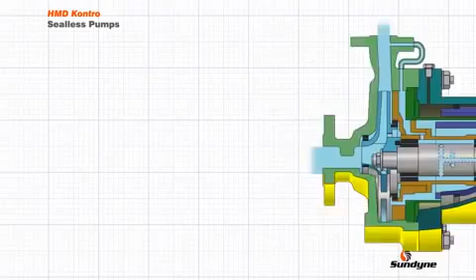Magnetic drive seal-less pumps, originally pioneered by HMD Kontro, have long been used to pump many types of liquid, including those that require safe and secure handling, without the added cost and complexity of mechanical seals and their associated support systems. This short video explains how this is achieved.

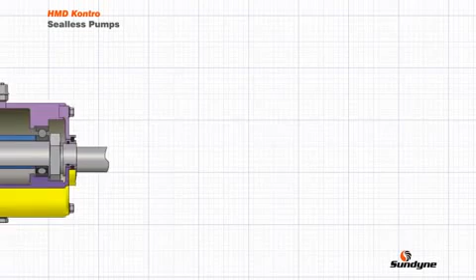The principle of operation for a magnetic drive pump can be best understood by building the pump up component by component. Firstly is the pump casing, consisting of the suction and discharge flanges and the casing volute. Inside the casing sits the impeller.

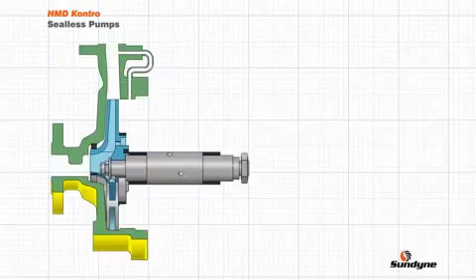Rotation of the impeller imparts energy to the liquid, causing the pump to operate. The impeller is supported by the internal pump shaft and shaft sleeves. The shaft is supported by the bush holder, consisting of a rigid holder and bushes or bearings which run against the shaft sleeves. Completing the inner rotor assembly is the inner magnetic ring.

This is a ring of coaxially arranged outward-facing permanent magnets, which are fully encapsulated with a resistant metallic sheathing. The final component in the primary liquid contact assembly is the containment shell.

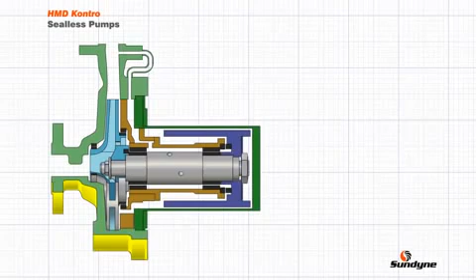This component is statically sealed with a gasket against the casing. The containment shell is usually manufactured from a high-strength, non-magnetic, corrosion-resistant alloy. Outside of the primary pressure boundary is a second outer magnetic ring with magnets that face inwards. The outer magnetic ring is located in the coupling housing, which is connected to the external bearing assembly.

When the pump is filled or primed, it can be seen how the liquid is completely contained without the use of any dynamic seals. The principle of operation is very simple.

The magnets in the outer and inner magnet rings are attracted to each other. So, as the electric motor rotates the outer ring, the inner ring rotates at the same speed, thus rotating the impeller and causing liquid to be pumped.

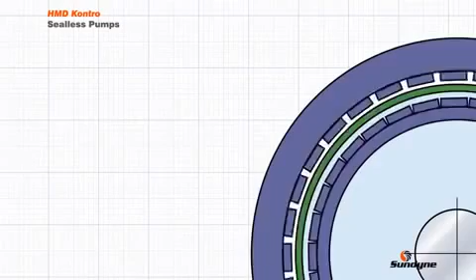To help understand how the magnetic coupling works, this animation views the coupling axially. The containment shell, shown in green, is positioned between the two attracting magnetic rings and will be subjected to the rotating magnetic circuits as the outer and inner magnetic rings rotate.

For strength and temperature resistance, the containment shell is usually manufactured in a metallic material, which is electrically conductive. It is this property and the rotating magnetic circuits that causes eddy currents to be induced in the containment shell. These induction losses manifest themselves as heat and have to be accounted for when selecting the pump.

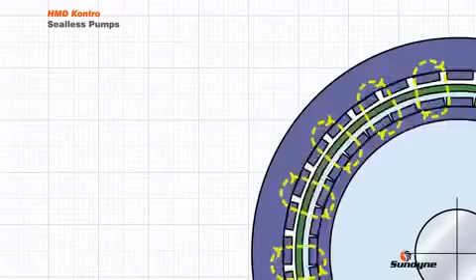It is important to understand that a small portion of the pumped liquid is also used to cool the magnetic coupling and lubricate the internal bearings.

The pump uses the pressure generated by the impeller to feed a small amount of pumped product into the bush holder. Here, the flow splits. A small portion of the flow lubricates the internal plain bearings and returns to the pump casing volute.

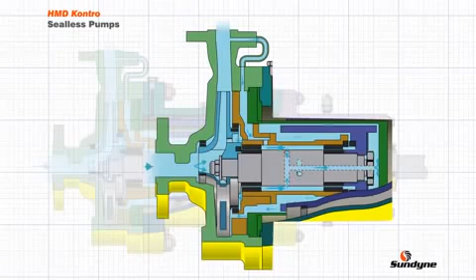However, the majority of the flow enters the holes in the pump shaft and travels to the rear of the pump, where it splits radially and flows along the annulus between the inner magnetic ring and the containment shell.

As already mentioned, the metallic containment shell has associated losses which need to be cooled, and it is this internal flow that provides this cooling.

After the flow has traveled over the inner magnetic ring, it then rejoins the bulk flow in the casing volute via the return feed hole behind the rear of the impeller.

It is important to understand the impact of circulating the pumped liquid in the internal feed system. As the liquid is circulated, its pressure drops and temperature increases. For safe and reliable operation, the liquid needs to remain stable at all times.

If a magnetic drive pump is properly applied and operated, it will provide many years of problem-free operation. However, failures occasionally occur, usually as a result of process system upset or operational error.

Many of the mechanisms that cause a sealless pump to fail prematurely result in the breakdown of the internal flow system and the subsequent presence of vapor. This is problematic, as vapor will not provide adequate cooling for the containment shell and lubrication for the internal bearings.

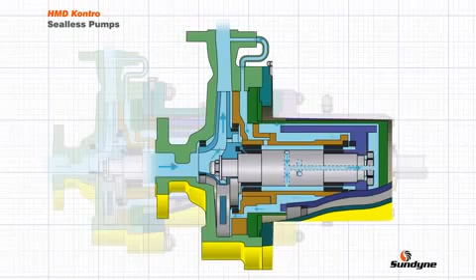Some such conditions can be detected by traditional instrumentation. However, these instruments tend to detect secondary effects and not the primary cause.

The benefits of a magnetic drive pump are as follows: no leakage of product, no dynamic seal or seal support system, complete fluid containment, zero emissions, cost-effective installation, improved operator safety, and protection of the environment. Please contact Sundyne HMD Kontro for further details.